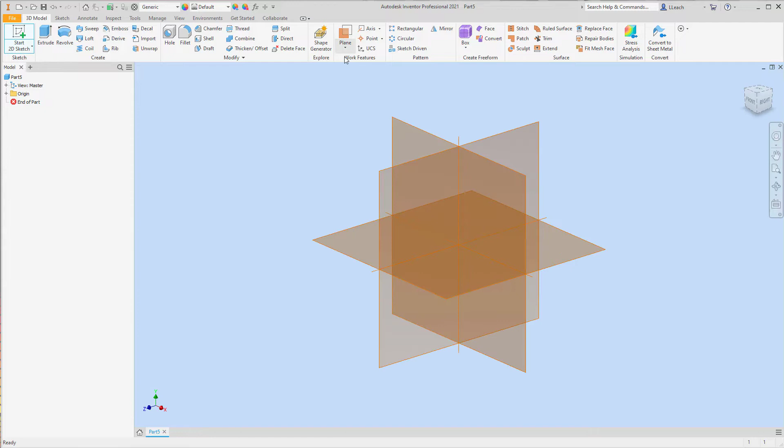So to do that, I need to start with the template that's the inches template, which is what I have. But let me just close this. I'm gonna go to new. So I want the English standard. I'm gonna go to create here. Then I'm gonna start my 2D sketch on this back plane, this XY plane.

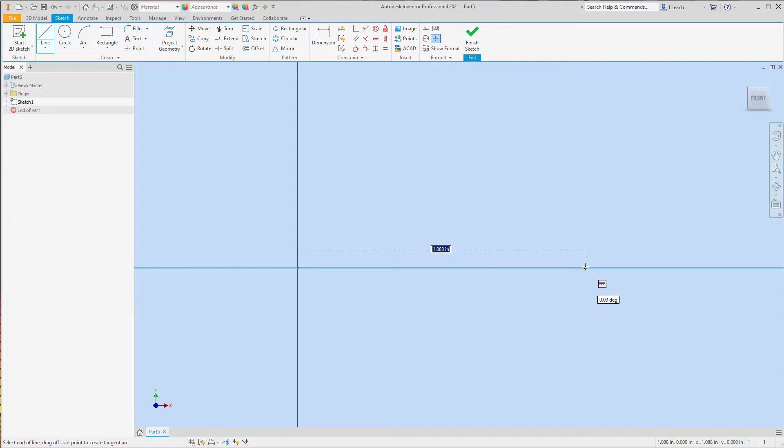And I'm going to use the line tool to start kind of drawing the shape of the outer perimeter. So I'm going to come over. This is 5.5. And then it's going to go straight up. That is 2. I'm going to start my line back on this other side here. And this one's going to go straight up by 4.

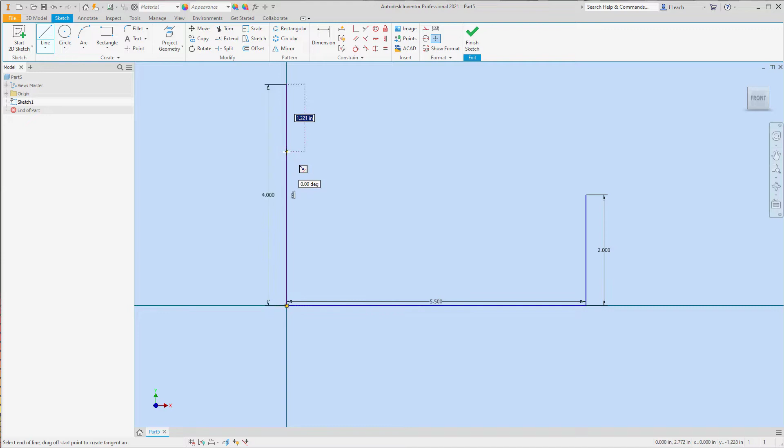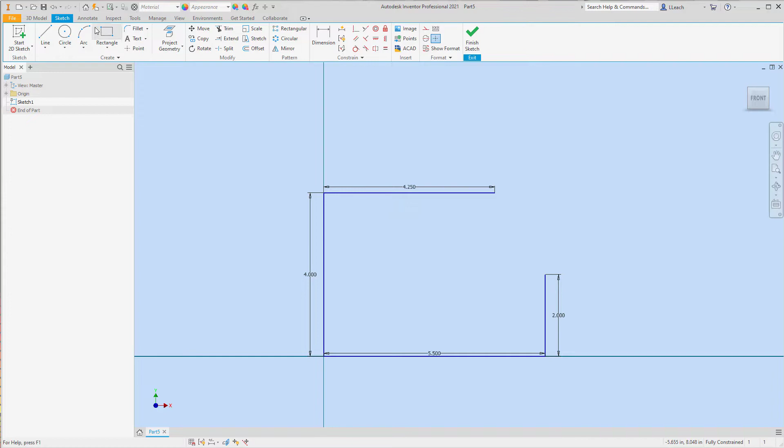And then I'm going to go over from there over 4.25. Wait, did I make that? Yeah, I made that too big. I'm going to change this. I said 4.25 and it went 5.25. There. And then I'm going to draw a line from this end to that end. Boom. All right, so there's our outer perimeter there.

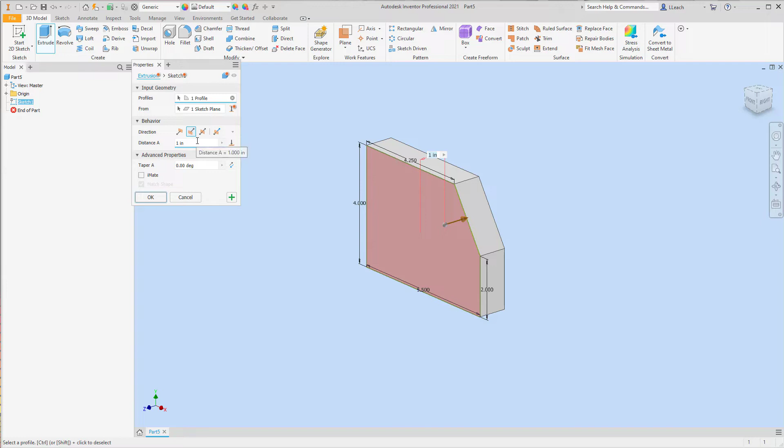I'm going to finish my sketch. I'm going to extrude this bad boy. I'm going to extrude it back. And then that's going to be 0.25 inches thick. And then hit OK. And then I'm going to create the features kind of one at a time.

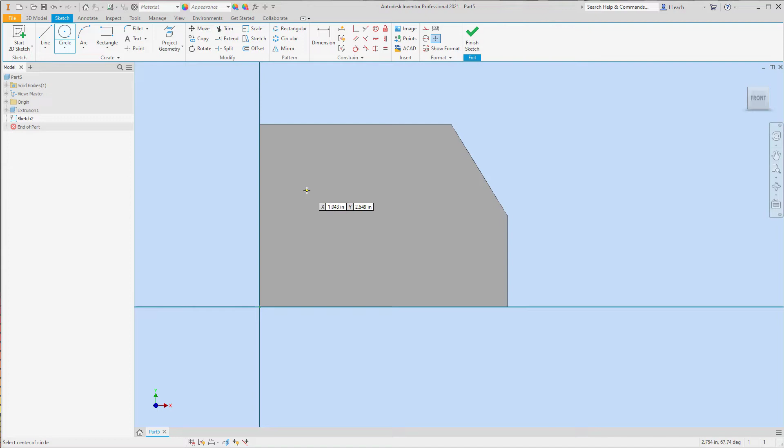So I'm going to start a 2D sketch on this face here. I'm going to draw just a circle up here in this kind of top left corner somewhere. I'm going to dimension this. This is going to be a diameter of 1. And then I need to dimension where the center is located. So from the center point of my circle to this edge, that's 1.

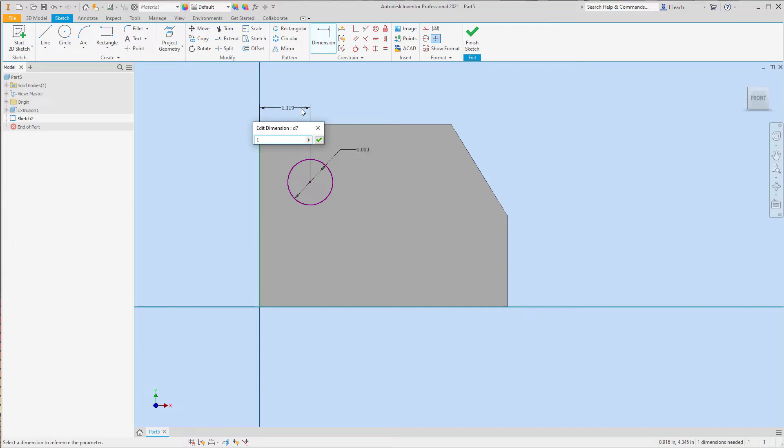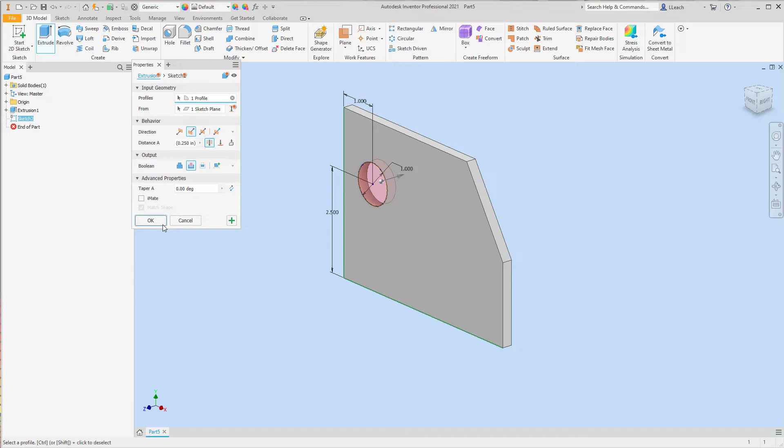From the center to the bottom edge, that is 2.5. So there's our first feature. I'm going to finish that sketch. I want to extrude cut this one all the way through it. So hit OK. Then I'm going to start another 2D sketch.

I'm going to create another circle kind of in the middle lower region, somewhere there. I'm going to add some dimensions on here. This is a diameter of 2. And then I'm going to dimension where the center is located. So from here to here, it shows that's 1.5. From here over to the left edge, that is 3.

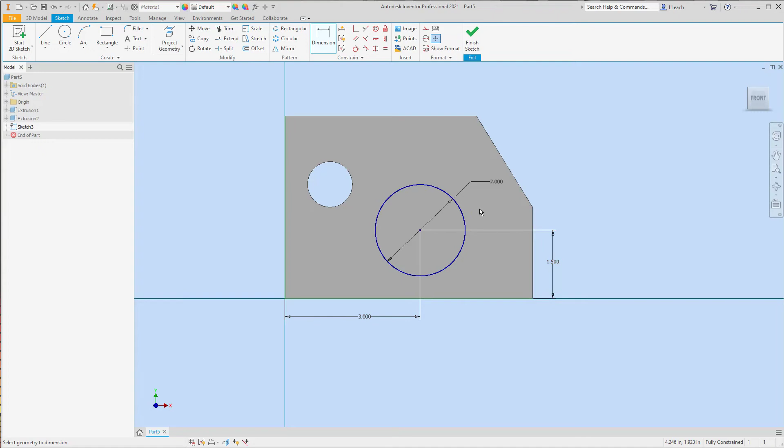Then I'm going to finish this sketch. So it says it has a boss height of 0.125. So I'm going to extrude this out by 0.125. And then I need to just create one more feature of the hole that goes all the way through. So I could either do the hole, which probably would be easier, but I'm gonna just start a sketch on the face here. We're gonna do the circle and just cut it.

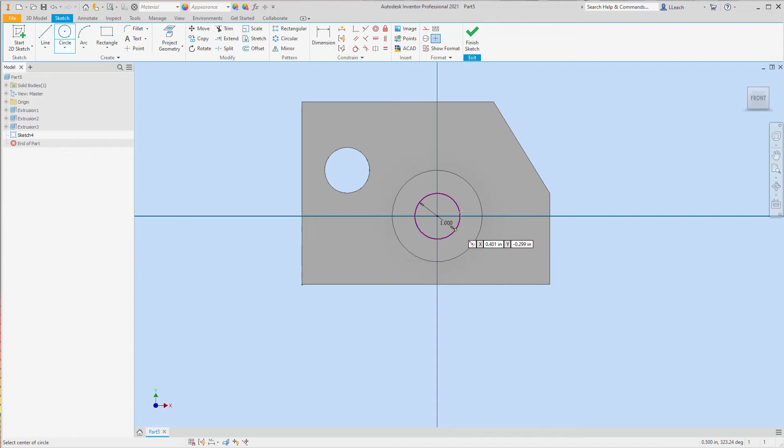So circle from this center here out, that's gonna have a diameter of 1. And then I'm gonna finish the sketch. And then I'm gonna extrude it all the way through. I'm gonna extrude cut it through all, bam. So there we go. So there is our guide plate.

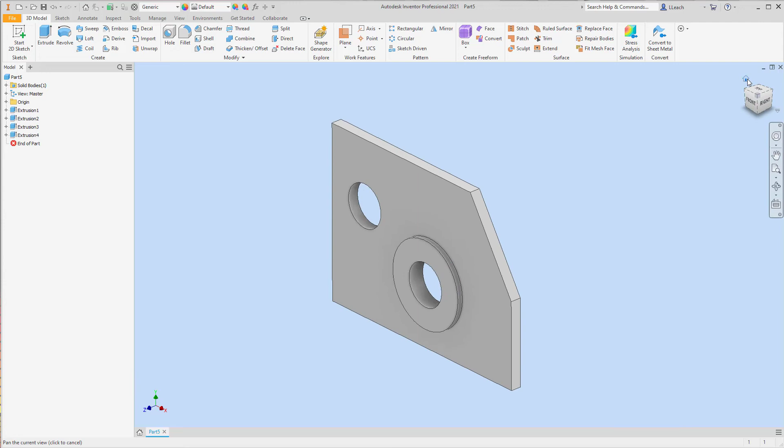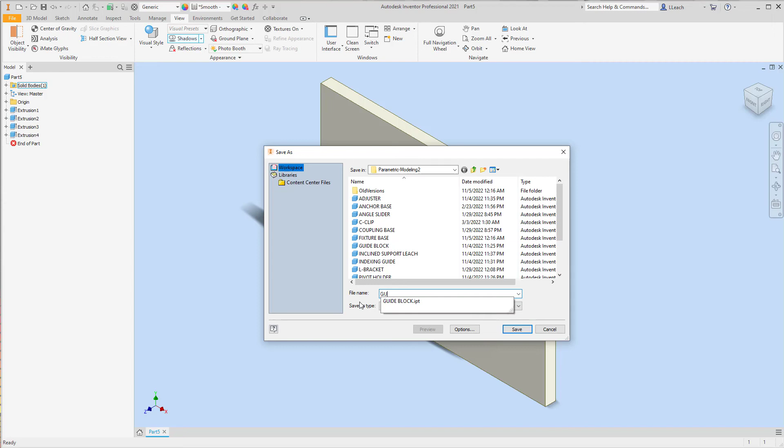So I'm going to click the home. What I like to do is I like to go to view. So my visual style, I like to do shaded with edges and then turn shadows on. For the lighting, I'd like to choose photo booth. And then for the texture here, I'm going to go to smooth ivory, and I'm going to save it as guide plate.

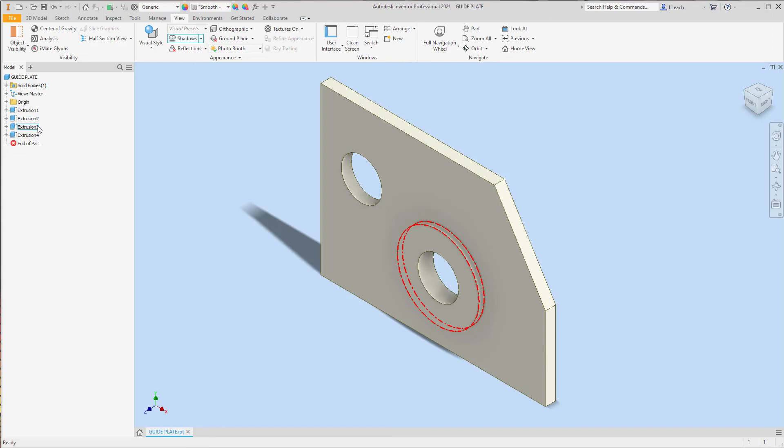There we go. So you could also, where you see the extrusions here, you could kind of double click on them real slow and just kind of rename these so you know exactly what these are. Because when you come back in later on, you'll see, what is extrusion 2? What is extrusion 3? You're not going to remember. So maybe just label this one as outer perimeter. This one is circle, upper left, just give them descriptive names if you wanted to. But anyway, that's kind of where we're at.